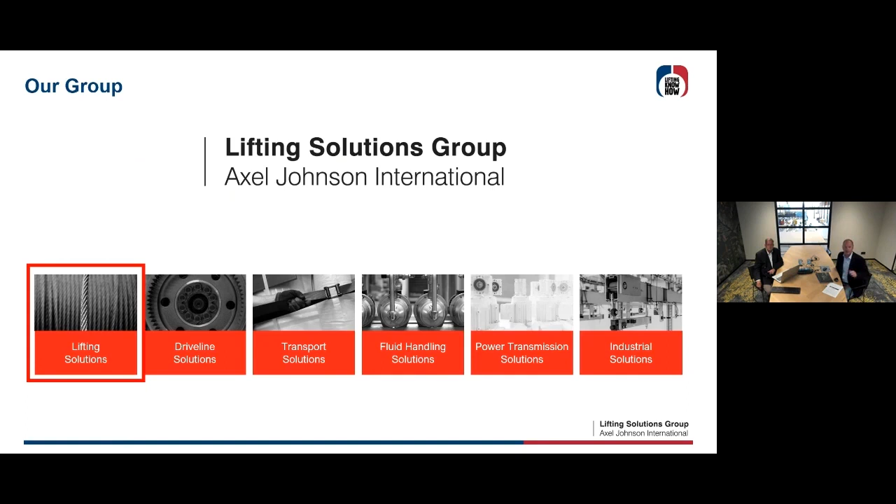First of all, a short introduction about our company. We're part of Axel Johnson International, which is a privately owned industrial group that acquires and develops companies in several strategic niche markets. And the Lifting Solutions Group is one of those 6 business lines within Axel Johnson International. We're a global player specialized in lifting equipment, steel wire rope, and services, but also fall protection, operating as a group.

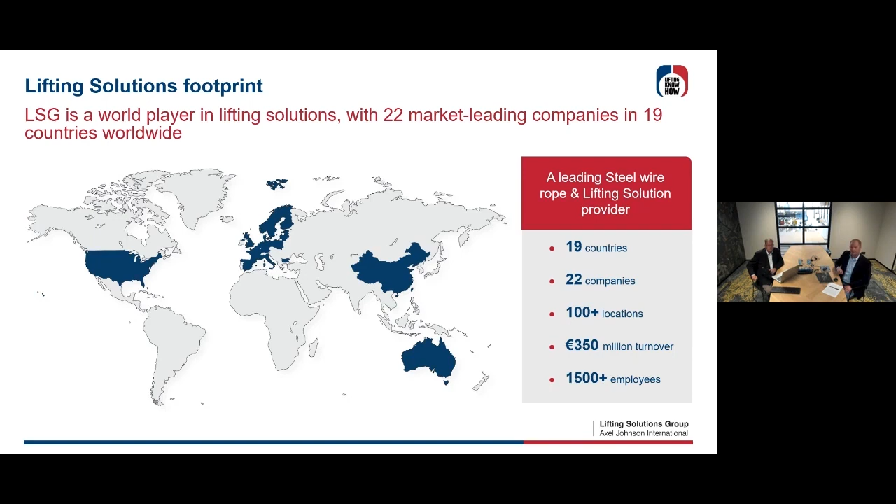22 companies in the group within 19 countries, and every country has almost its own local company that serves local customers. Here you see a little footprint of our company within the world. Mostly is situated in Europe and Scandinavia, but since a couple of years we have Australia with 5 companies, and we also have the part in the USA since I think last year. So we're pretty much spread into the world. This is our group within Lifting Solutions Group, a group of companies with strong local brands and presence and serving customers worldwide.

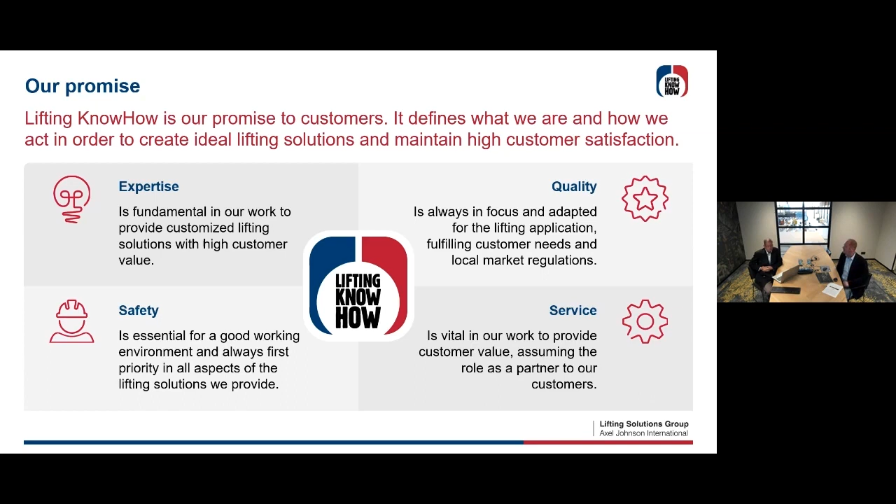And I think one of those logos looks familiar to you. Last slide for this introduction, then I'll hand over to Alain. This is our promise to the customers. We don't only sell products, we sell expertise, safety, quality, service. That's our main goal in everything we do, which is named the Lifting Know-how. Subjects already known: end terminations, cutting ropes, and now hand over to Alain.

Okay, what we're going to do today is talking about end terminations on steel wire rope. As Michel already said, the first seminars were about standard ropes, about high performance ropes, about discarding ropes. Then we had a seminar about greasing and re-greasing ropes. Okay, let's talk today in 20 or 25 minutes about end terminations, because if you've got a good rope, it's very important to also have a good end termination on your rope. Here you see some examples: some eyes, some thimbles, some sockets. Let's talk about these things, which have their certain applications and reasons why, and the advantages and disadvantages.

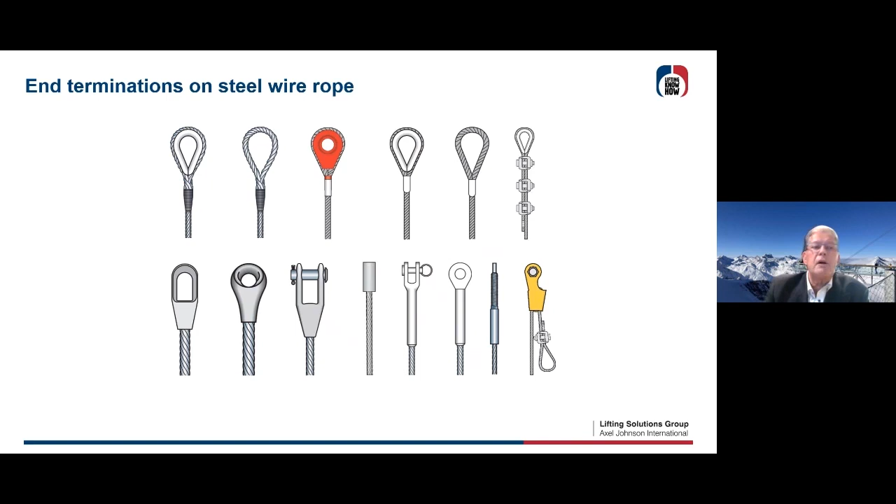So the fill factor will give you the right number of ferrule to use and dies. In general, if you have a rope with a fiber core, you're going to need the same number as your diameter. If you have a rope with steel core, you're going to add one number up to the diameter. And if you have a special rope, let's say compacted, you need to have 2 numbers up for taking the right ferrule. Check it out, because it's very important.

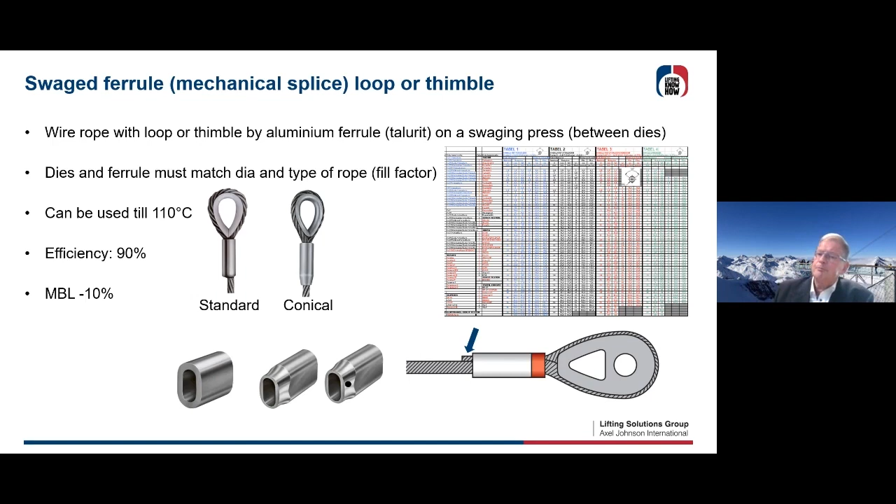The second type of swaging is what we call the Flemish eye or super loop. Flemish eye, well, I'm from Flanders, and I can't explain why everybody in the world calls it a Flemish eye. Is it a Flemish invention? I don't know, but even in Russia, even in French, even in all the different languages, it is called a Flemish eye. And you can do it on 6 and 8 strand ropes.

The procedure is, you split your rope, so in 2 parts. We're going to see a movie afterwards, so I explain it first, and then you're going to see the movie. It is spliced by hand into a loop, or you put a thimble in it, and then if you got the loop, then you're gonna swage it with a steel ferrule, yeah, a conical one.

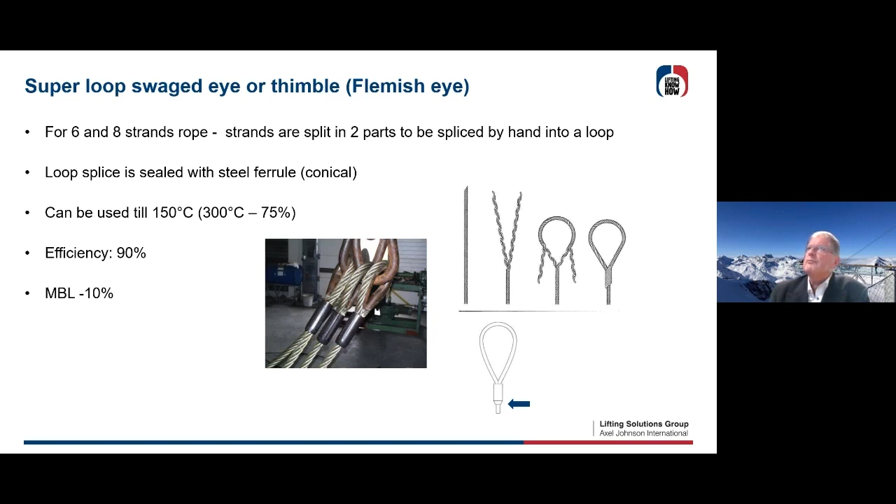And then you have, let's say, the complete splice and swaging, and it has the advantage that you could go up to 150 degrees Celsius because it's a steel ferrule, and even to 300 degrees Celsius, you're going to lose about 25% of your minimum breaking load. But anyhow, for high temperature applications, this is the one to use. The efficiency is also 90%, so you're going to lose about 10% of the minimum breaking load. So let's see now how things are manufactured. I think we're going to start the movie now.

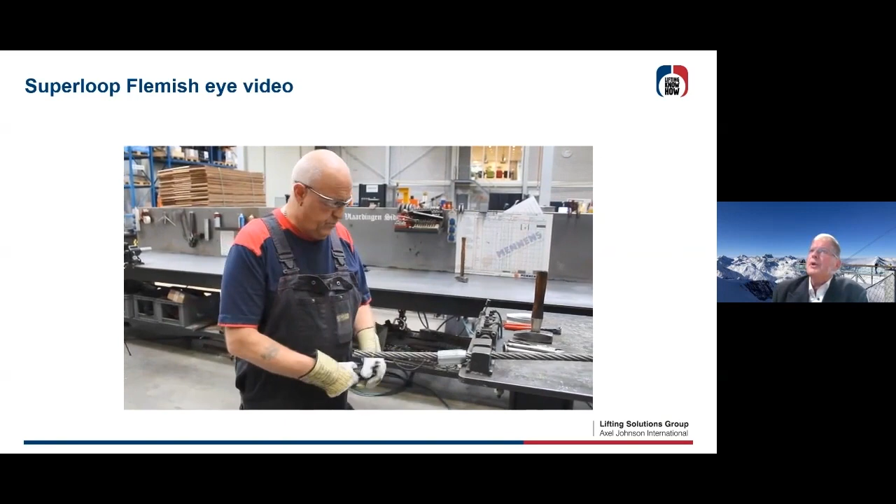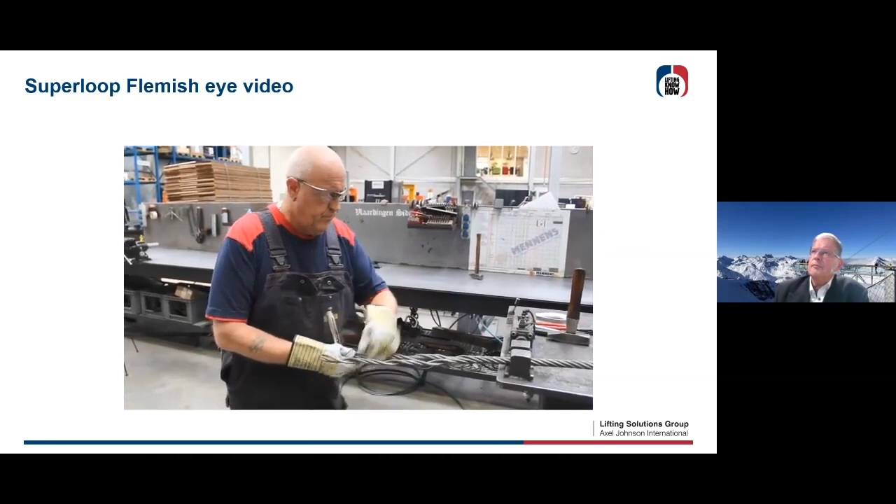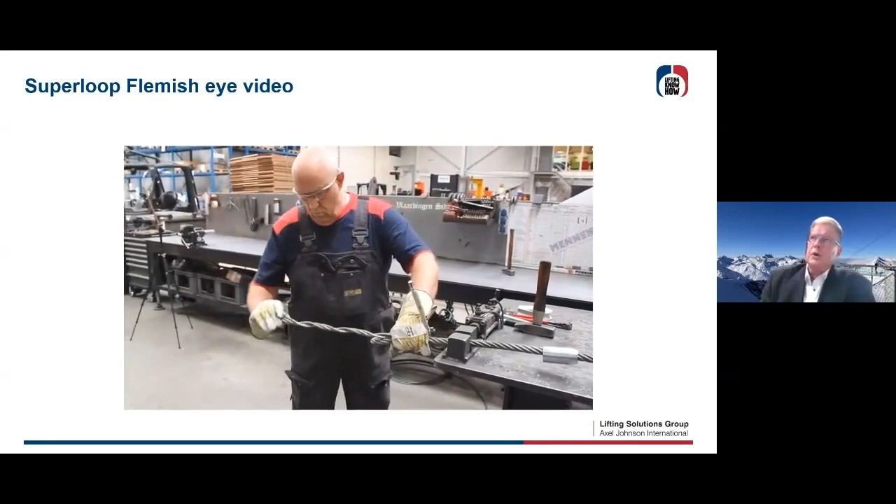First, you just put a line on it where the ferrule will come, and then look at it. The guy is going to split the rope into 2 parts. So this is a 6-strand rope, I think. So you see, he takes 3 strands, and he leaves the rope core and the other 3 strands. Then he puts a clamp on it, and then he's going to make a loop. You see, there's a special procedure. You have to know if you're working with 6-strand or 8-strand ropes, if it is with steel core or if it is with fiber core.

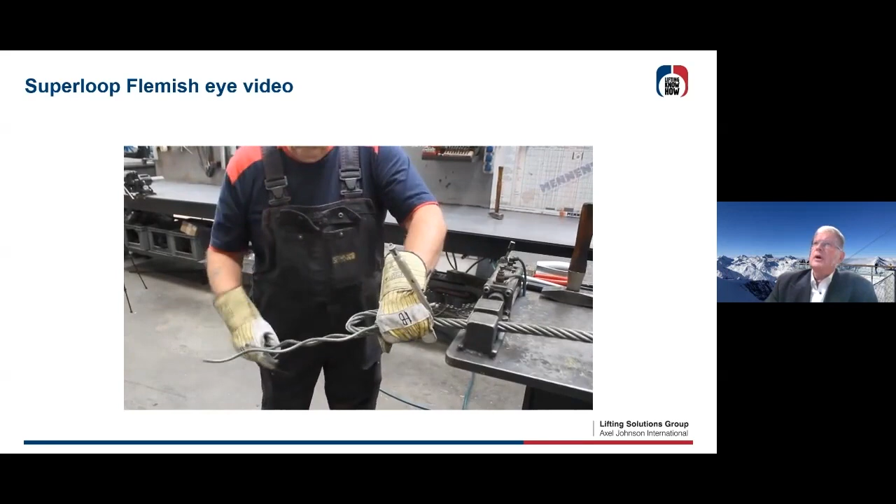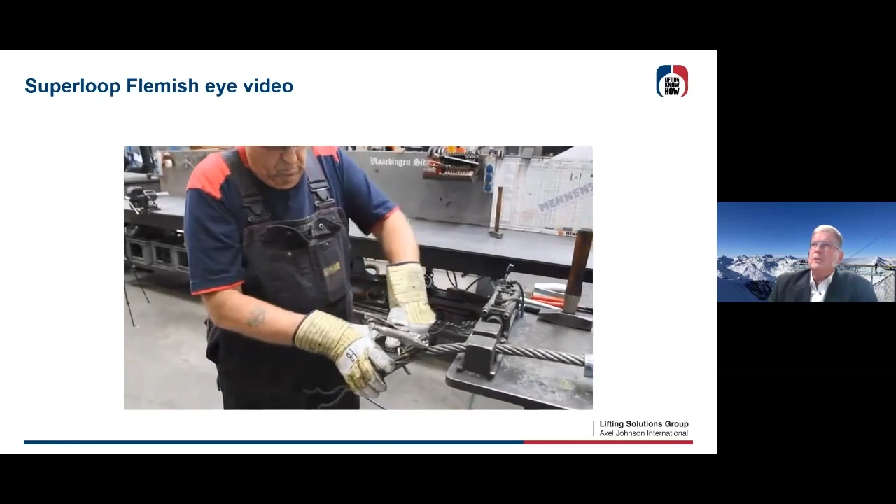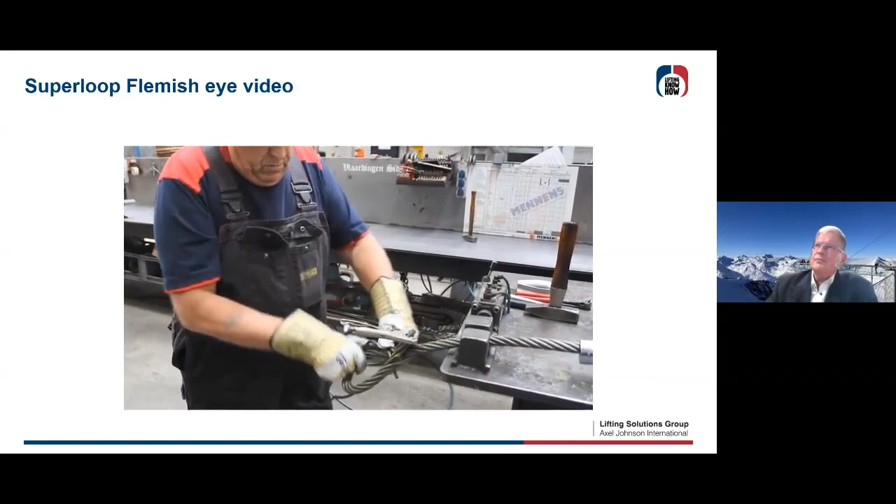There's a certain procedure for it. It is, let's say, know-how, how you do it. You see, he splices the 3 strands back into the loop. This is a small diameter, but you can imagine if you were talking about, I don't know, 58 millimeter, then you're going to need 2 guys to do this job. So each strand goes back into position. Okay. And the last one. So you got an eye.

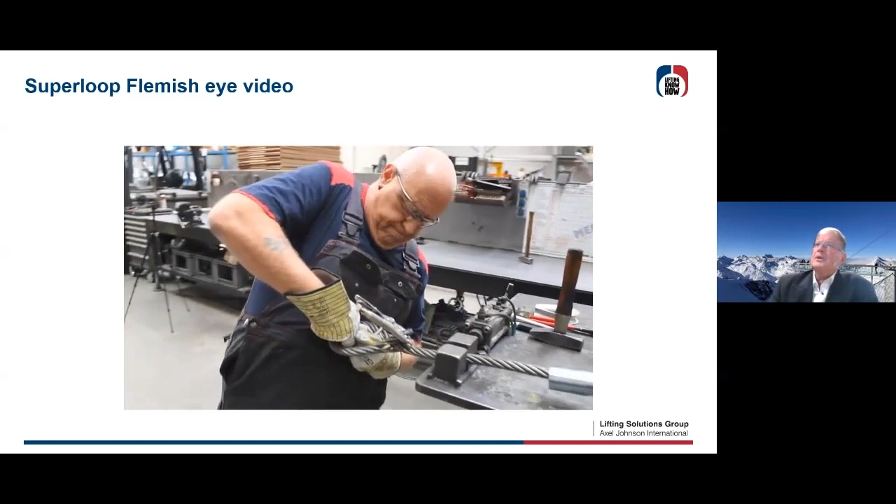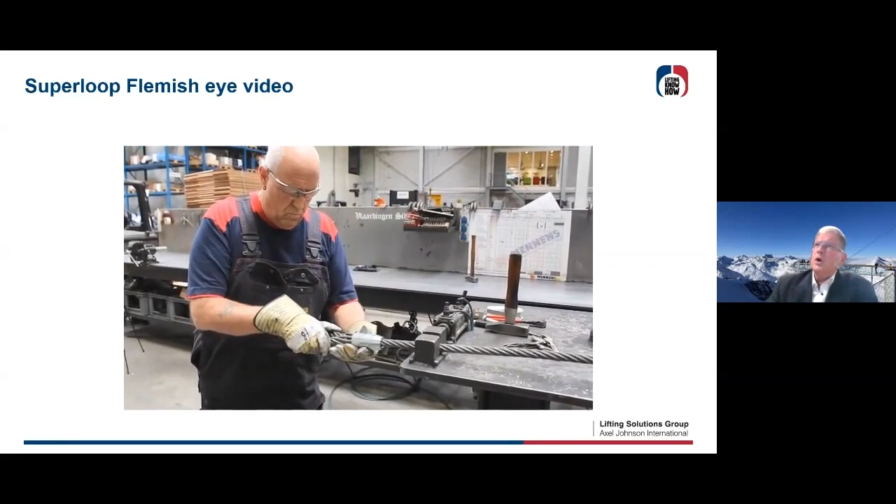Now we can put a thimble in it if you want. But he's going to splice now these little ends into the rope, and then you're going to pull the steel ferrule over the splice. So this is sometimes a harsh situation. I mean, sometimes you need to have some equipment to really slide it over. Okay, this is the first step. If you leave it like this, hand splice will give you about 75% of the minimum breaking load. So in some emergency cases, you could use a Flemish eye, just splice it like this, and then you end up with 75% of the minimum breaking load. Now we're gonna finish it up with the swaging.

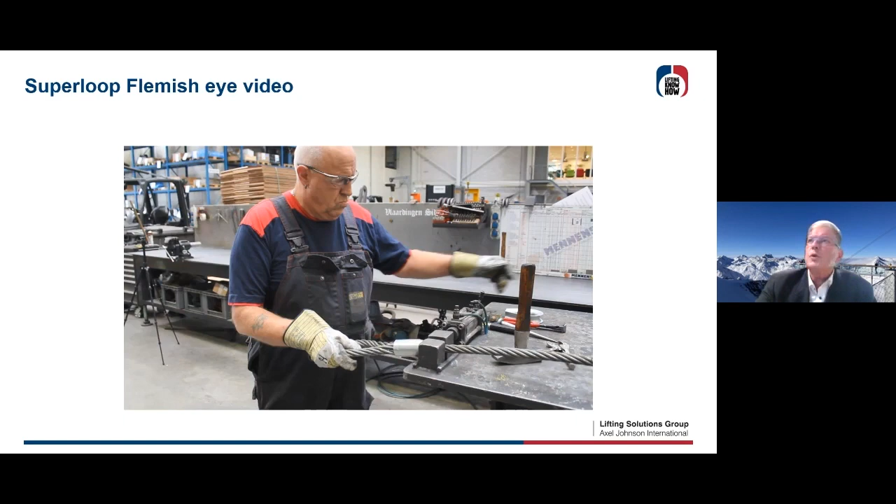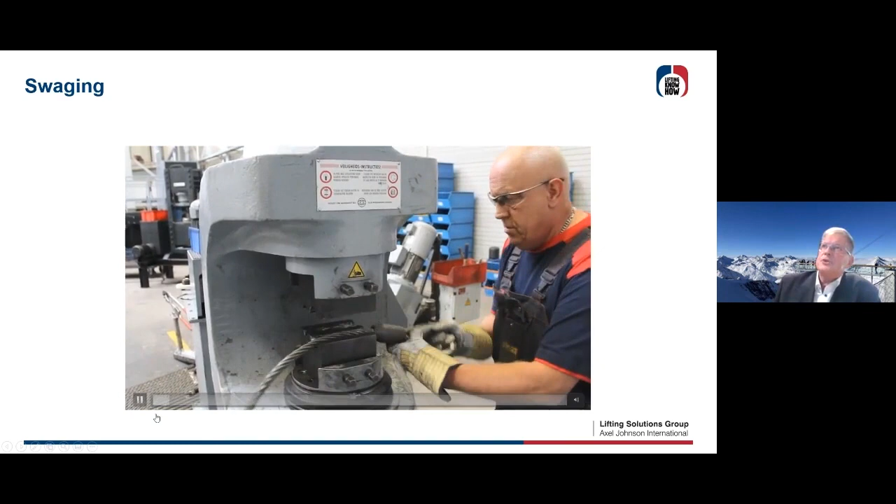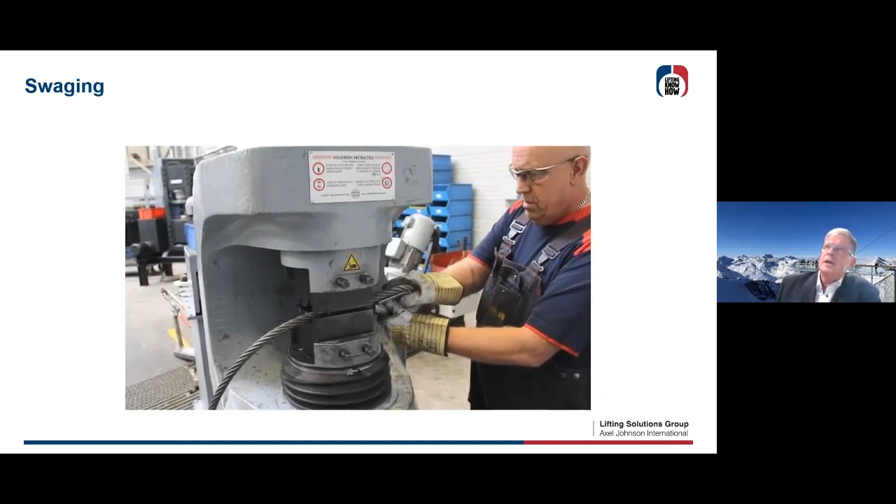Let's hope it starts. Okay, so then you need to put your special dies into the machine. For some diameters you use your swaging die once, and for other diameters you use it two times. Okay, you can see he turns it until the dies are completely closed.

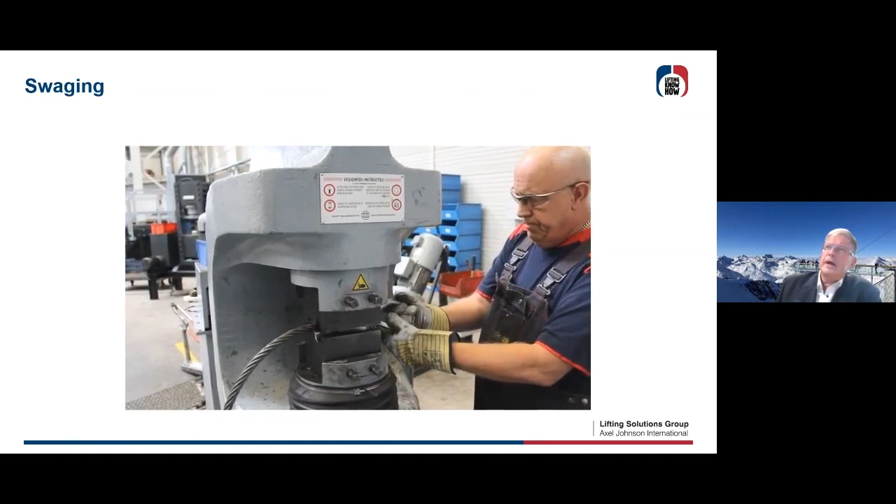And then he puts it into another die, let's say. Okay, so he turns it and he waits till the two dies get completely closed. Okay, that's it, guys. So you have your complete Flemish eye super loop swaged termination. There you go.

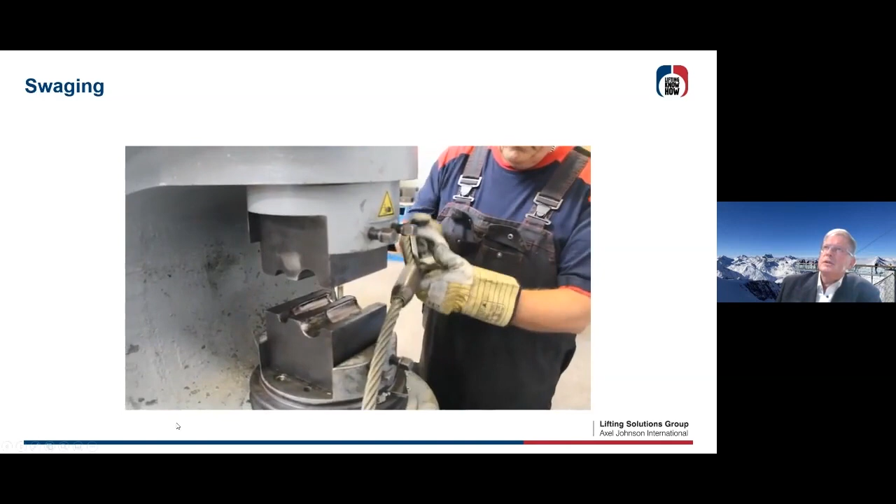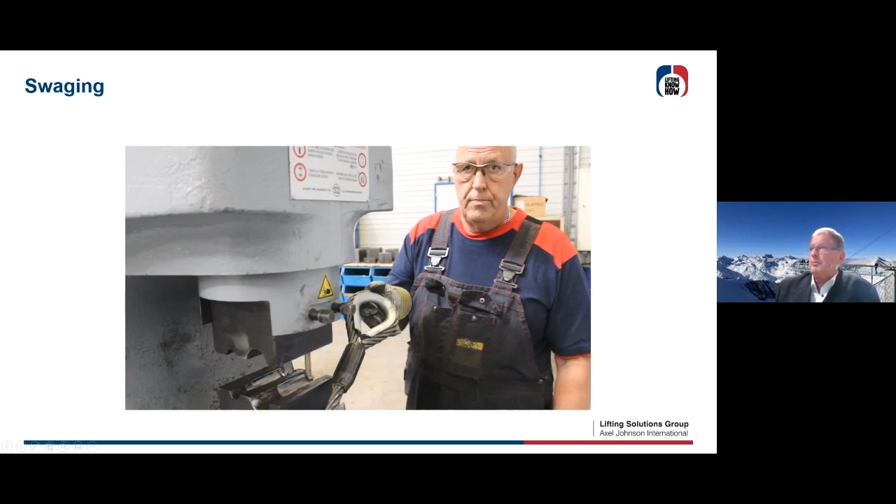You see, it is conical, so sometimes it has the advantage that it can be easily used underneath your loads to pick them up.

Okay, another termination is the swaged forged terminal. You're going to have different types, let's say. You see here some with an eye, some with a fork, or there are applications where you need a thread end. It is all done, as seen, with special dies to swage on. Sometimes there are standard dimensions you need to put into the dies, or sometimes you're going to end up with custom-made things.

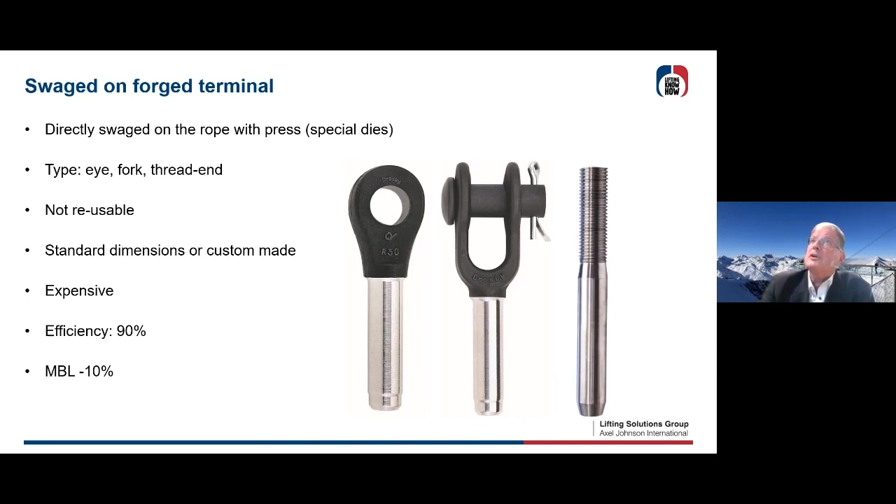So be careful, not everybody has all the dies in the workshop. So sometimes you need to go to a standard dimension. It is, of course, expensive because these things have to be made properly, and all the different kinds of dies also cost a lot of money. Efficiency is 90%. So it is, let's say, very special with these kinds of forged terminals.

Even for end stops, you can use the same procedure. You swage that end stop on the rope with special dies. Sometimes you have very special end stops with dimensions for Liebherr, Demag, Fuchs. These dimensions depend on the socket you're going to use on your crane. These swaged end stops are normally done on new rope, so the diameter of a new rope will fit into these end stops.

And attention, if you're going to use it on used ropes, due to damages you may have, then be careful. Normally we do a test then to see if the fitting is 100% safe. So you have in the pictures different types of end stops, round ones, special ones, but be careful. These dimensions have to be checked.

Another very common end termination is sockets. Sockets like you see here, so open spelter sockets or closed ones with certain pins or with bolts and so on. This kind of socket is the strongest end termination and it is reusable. If you use a spelter socket with resin poured in, normally you can empty the socket afterwards and use it again. So sockets are reusable. This gives you a price advantage.

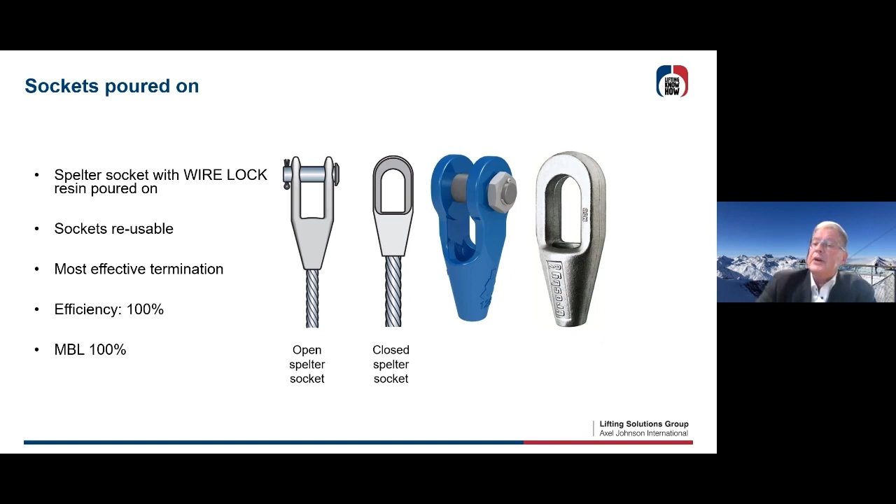How is it done? Well, this is the only end termination which gives you 100% of the breaking load of your rope. And it is, of course, done with a certain procedure. I give you a little show here of how this has to be done. First of all, you have to seize your wire, like it is there in the pictures. So you need to seal your rope. Then you open up all the different strands, even the center core.

If there is a rope core in it, you have to cut the rope core out of it. And then you open up all the strands to form a broom. This broom afterwards has to be degreased, because in your rope you normally have a certain amount of grease, but for socketing, the broom has to be 100% clean. So we have to do some degreasing on this part of your rope.

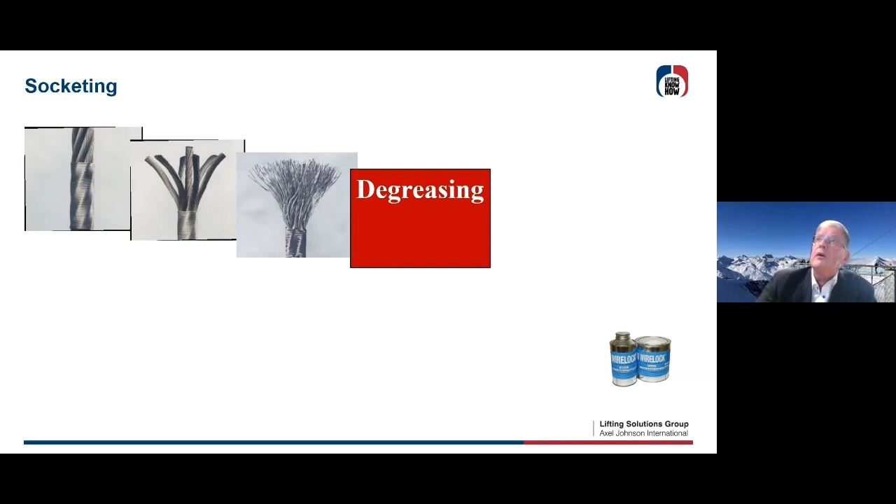Then you pull the socket over it, and then you make your two-compound resin. Normally it is a powder and a fluid, which has to be mixed thoroughly. And then you pour it into the socket, and you wait about half an hour or an hour, depending on the temperature or the dimensions of the socket. You wait for, let's say, one hour, and then you can use your socket and your rope immediately.

This was the first resin which was certified by Lloyd's. So it is still the original one, let's say, invented in England. You can use these end terminations till 150 degrees Celsius.

Be careful, there are other resin types which are not usable till 150 degrees, only till 70 or 80 degrees, and be careful if you use these things on, let's say, a dredging ship. If these sockets are in the sun, let's say in the Pacific, they can easily get up to 100 degrees in tropical situations, so be careful.

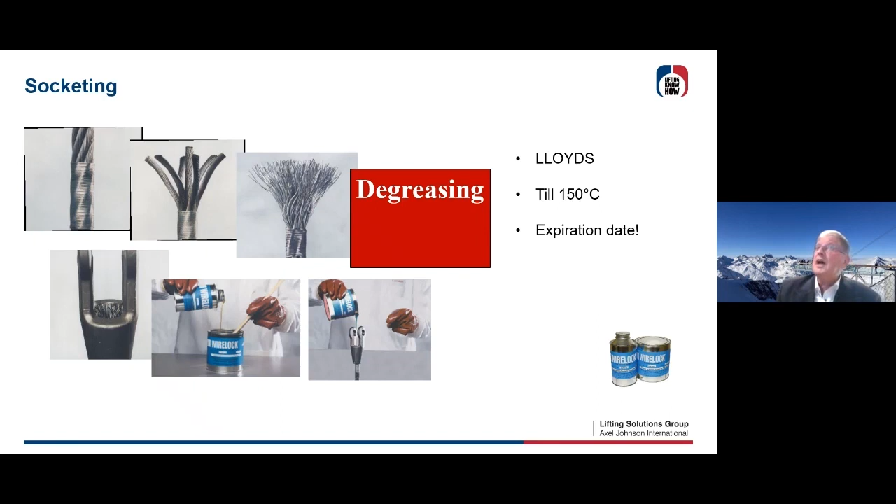This is socketing. Let's see how this works in practice. We have a little movie. I'll show you. If you've seen it once, you're going to remember it forever, I think.

Oh, something's gone wrong. Just turning back. I think, okay. There it comes. Sorry, guys, but this is technique.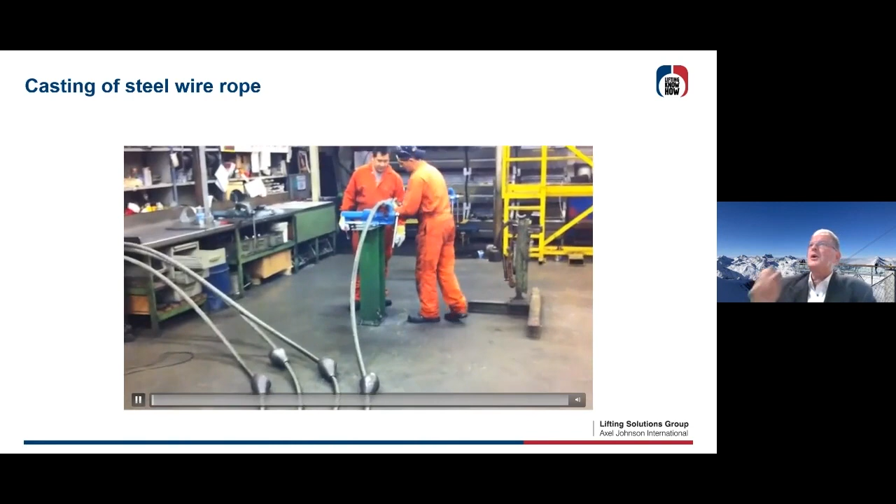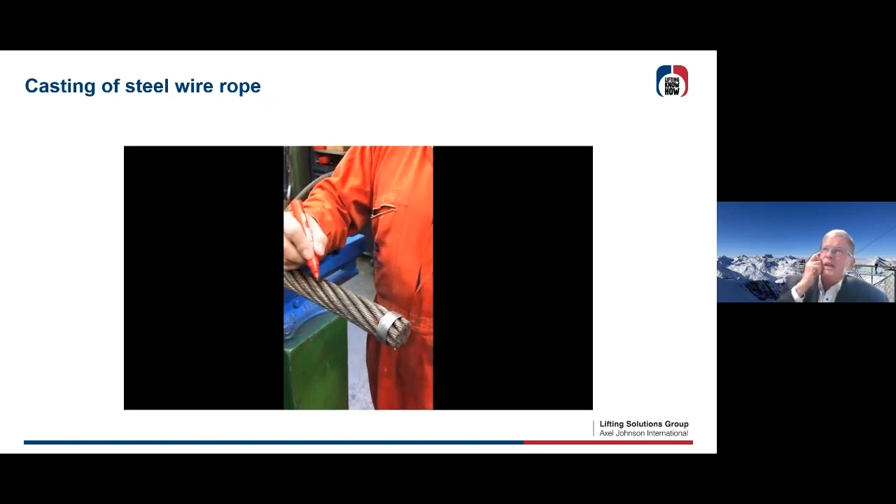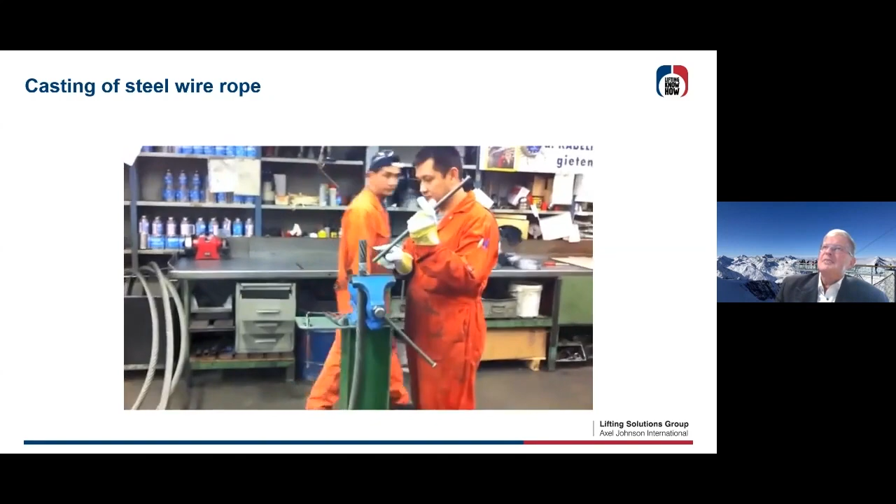Okay, let's do it. First of all, you have to have the right dimensions, where the socket is coming, which part of the rope needs to be opened, and then you have to seize it thoroughly. Look at this. This is well done, I think. It's a Mennens invention, I think. Okay, you see, very well seized.

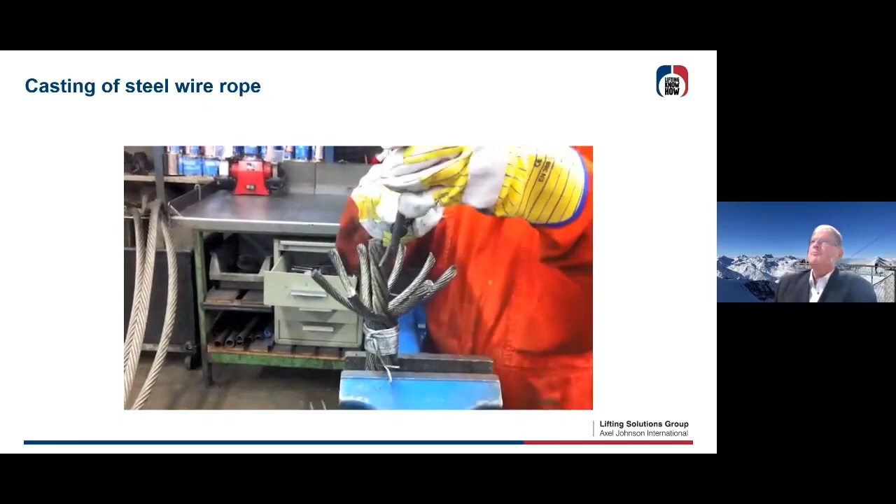And then you open up all the strands. I think this is an 8-strand rope. So every strand has to be opened up like this. Again, if you have a steel core, you open up the steel core too. If you have a fiber core in it, you cut the fiber core out. If you have a high performance rope with plastic infill, you have to cut the plastic infill too. So all the strands now have to be opened like this.

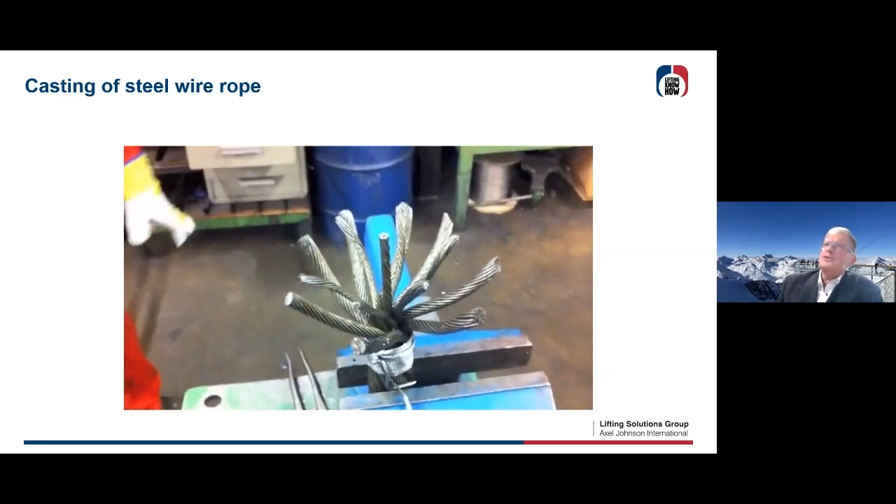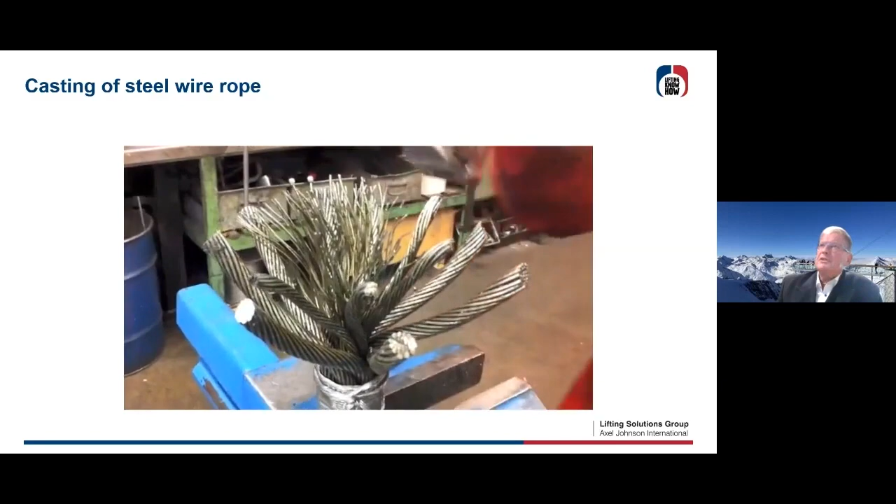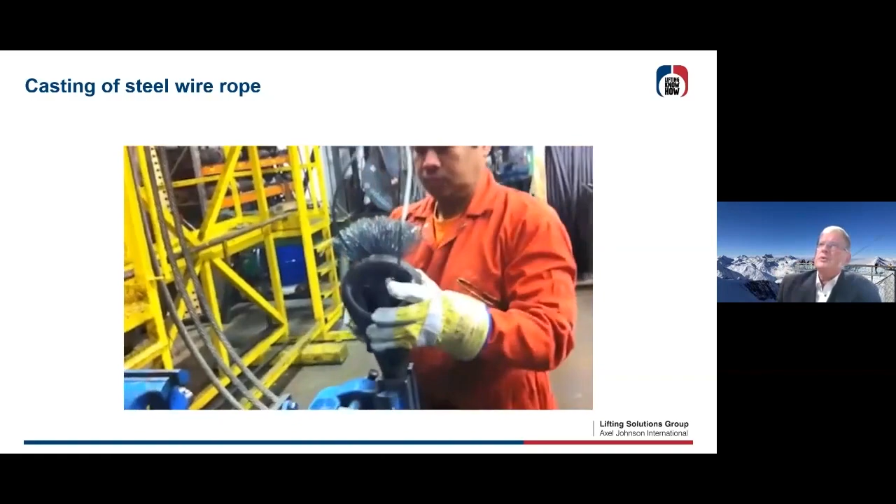You see some specific tools we have also invented to open this up easily. All the different wires have to be spread into a very nice broom. Open up thoroughly. You see that all these wires still have a little grease on them. You make a very nice broom, and then you degrease the broom. You have several kinds of degreasers to use. Once the wires are degreased, they are clean, and then you put the socket around it.

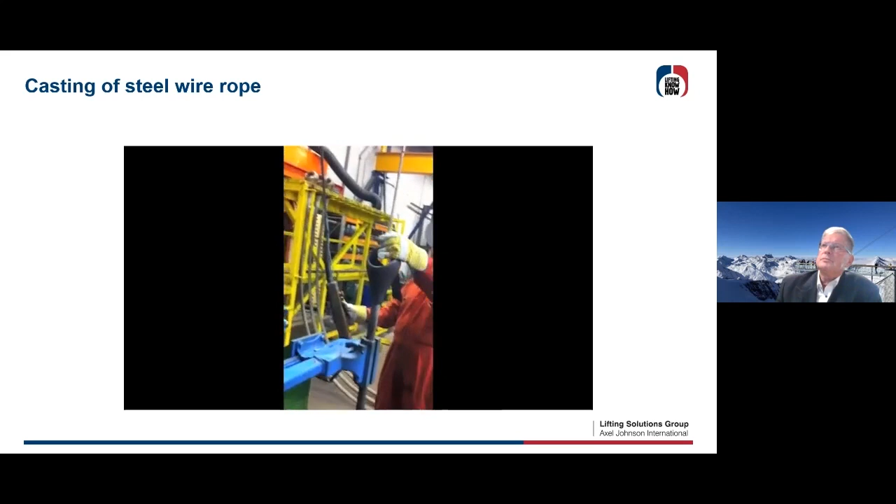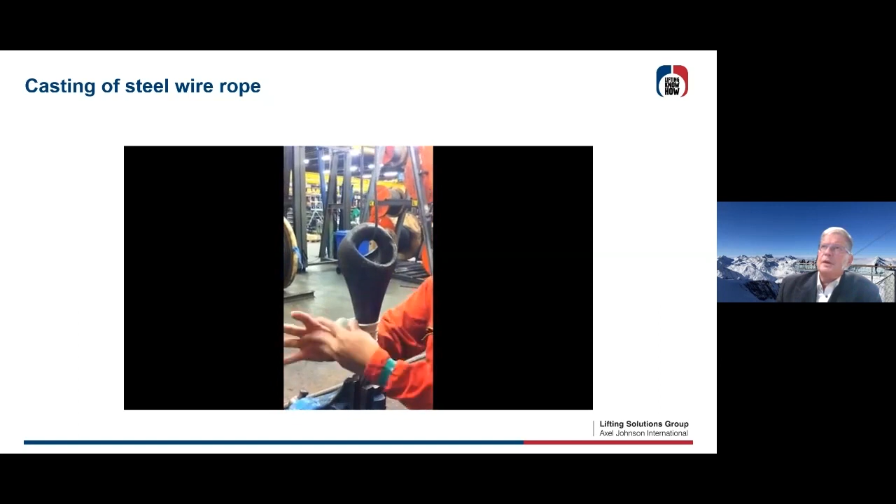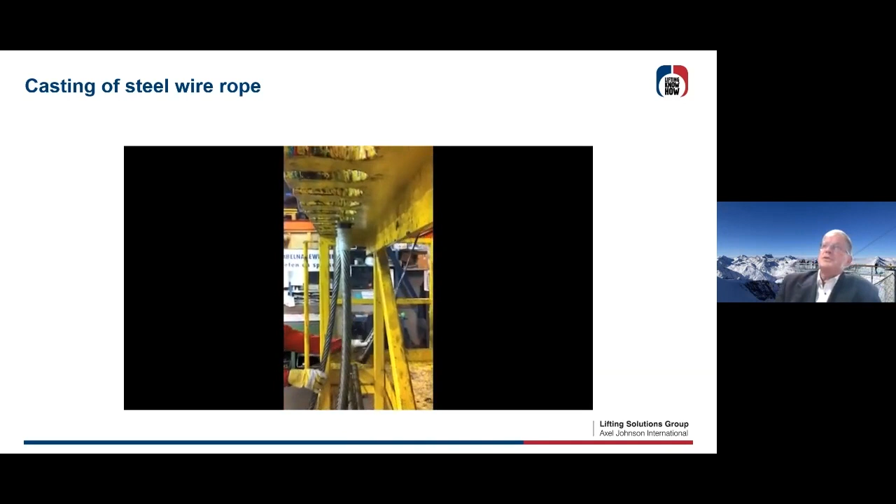Okay, and then you seal the bottom of the socket because you're going to pour fluid into the socket. So you need to seal off the bottom of your socket so that it won't drip out. This is a special tape we're going to put in there. Okay, and then we put it into the stand. In our workshop, we have different stands like this. So when we do the pouring, we can pour several sockets at a time. There you got it.

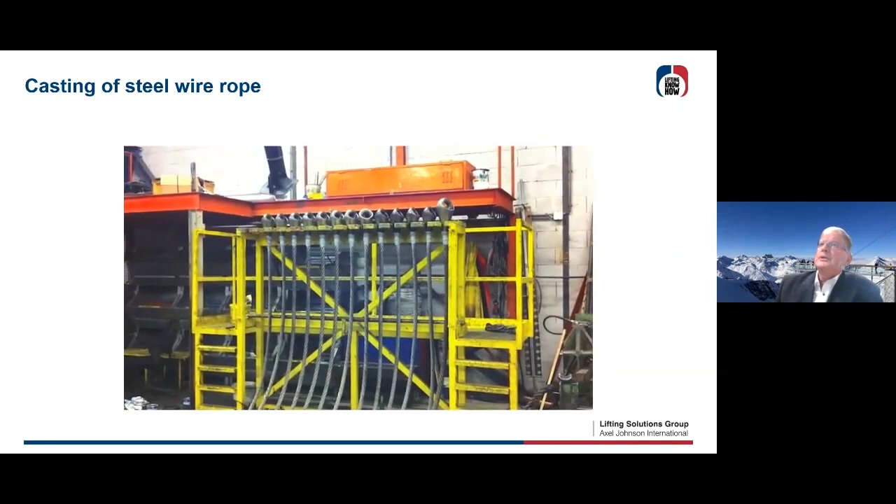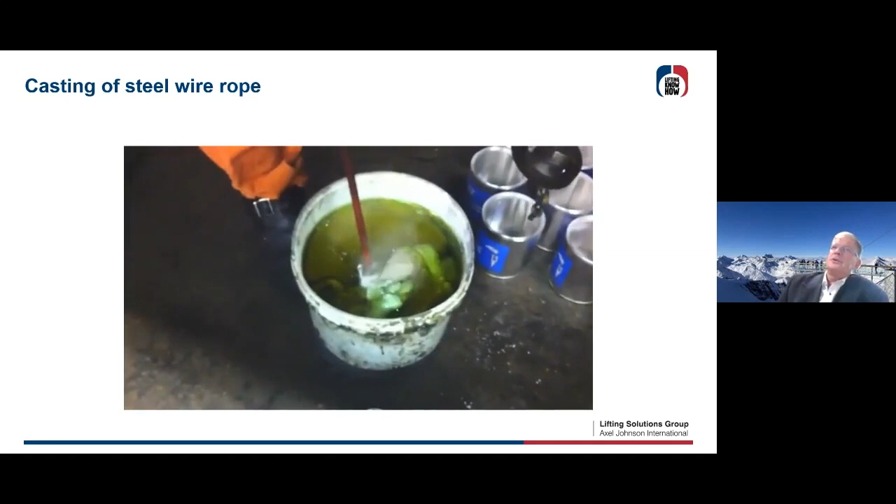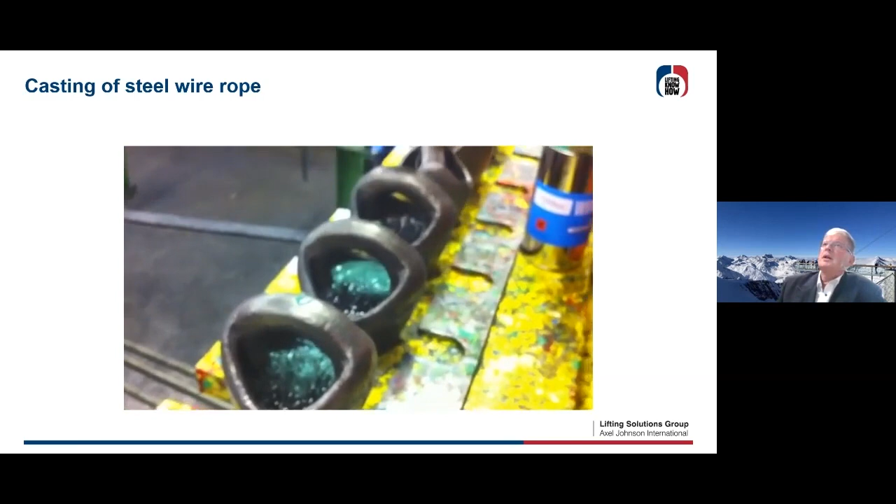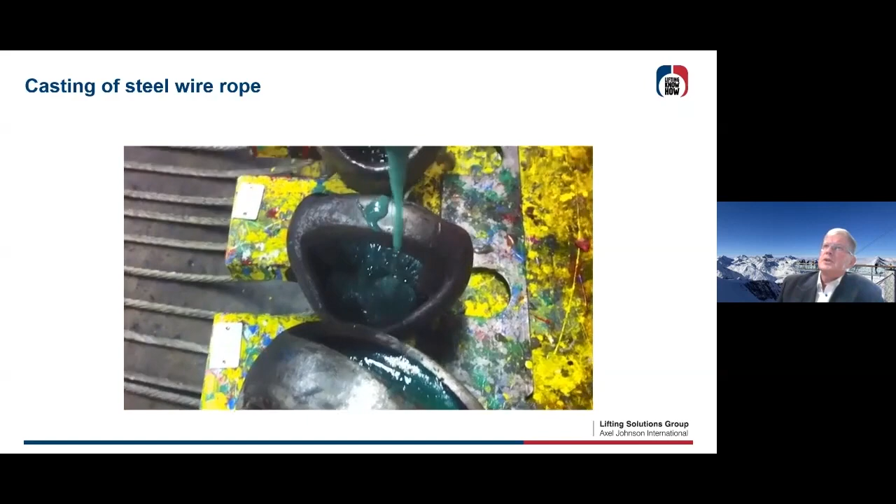And then, okay, we prepare the resin. You have a fluid part and you mix it up with the powder. Once it's fully mixed, you can immediately start pouring it into the sockets. You put some in first, so things will get deeper and deeper into the socket, and then you pour some more. So then in the end, you're going to see that this is at the right level. You see, it's going down, down, down. So you wait, and then you put some more in it, and then this is the end situation.

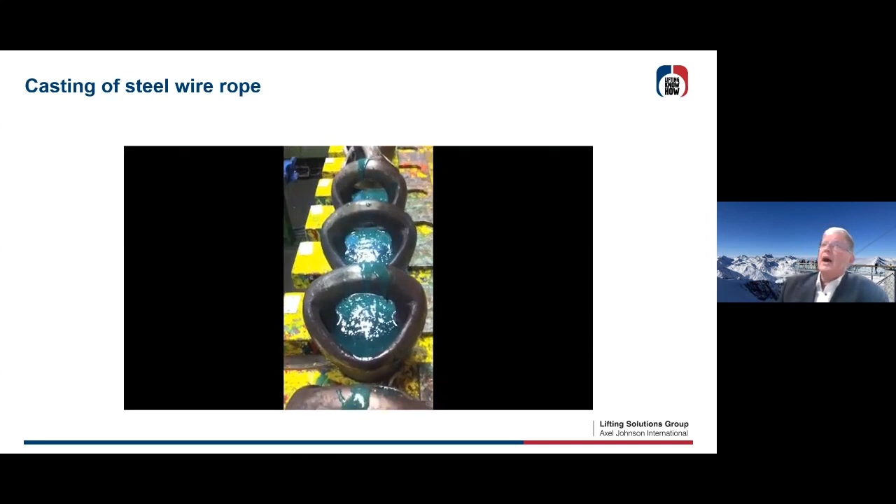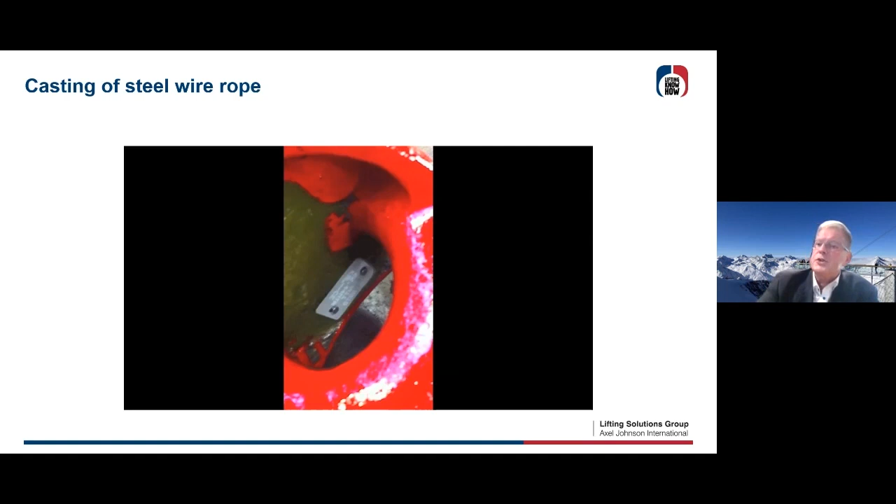And then you wait for about an hour. The socket and the resin will warm up to about 50, 60, or 70 degrees. So there is a chemical reaction. What you can see here is the end sockets. We normally put a mark plate in it with who's done it, where it is done, with a number, so that things can be checked afterwards. We also re-grease the little part under the socket, which was eventually also degreased. So we put a special grease under the sockets, so that the socket and the part under the socket is re-greased again. So this is, let's say, the resin type of pouring on.

In some countries, and especially in Germany, there are still sockets poured on with fluid metal alloy, let's say Zamak. It is hot metal, which has to be poured in at about 340 degrees.

The sockets are reusable, but be careful. Every time you socket it on with hot metal, you have high temperatures, and sometimes you heat it up above 340 degrees, and then you have a change of your socket material. Of course, you also have deterioration of the wires by temperatures with this kind of casting.

You also have 100% efficiency, and the same procedure about the wire lock resin is done, but of course it's much more difficult to do because you have to take care of high temperatures, warming up the sockets and so on. You have the advantage that if you need to use the socket again, you can let the hot metal drip out of the socket.

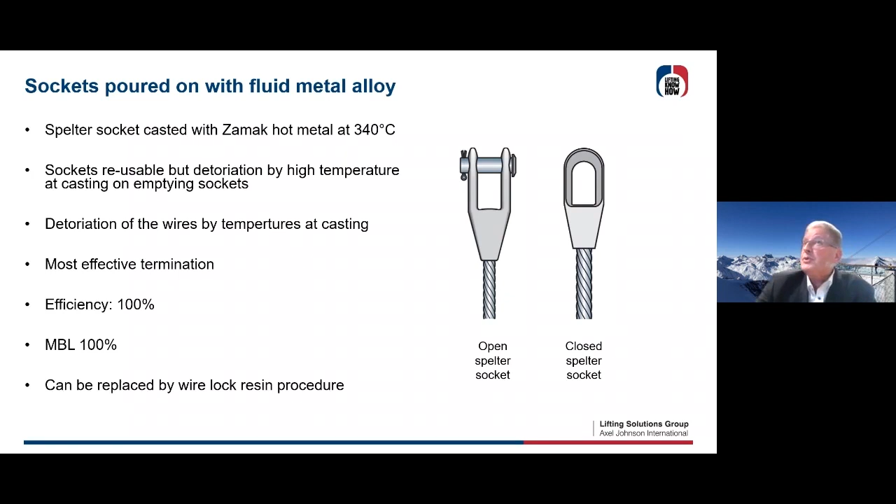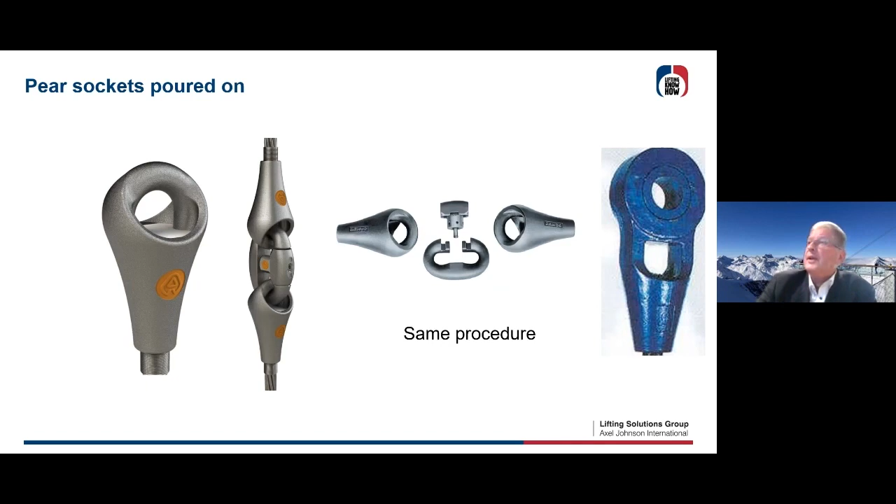If you do it with wire lock resin, you have to press the complete cone out of the socket. So there you're going to need a press or something to empty the socket. That's it with sockets. I show you here some more different kinds of sockets, like pear sockets, which are very common in bands. And on the right side, typically sockets from Demag or from other brands. You can use them.

Due to the easy procedure of socketing, in the last 15 years we invented end stops for socketing on ropes. This is done with smaller pieces of end stops, as you can see, with special housings or special sockets where this end stop will fit in. The dimensions of the socket and of the end stop are special for each brand: Liebherr, Demag, Manitowoc, Faun. So it is done mostly on non-rotating ropes for easy reeving or multiple reeving on mobile cranes.

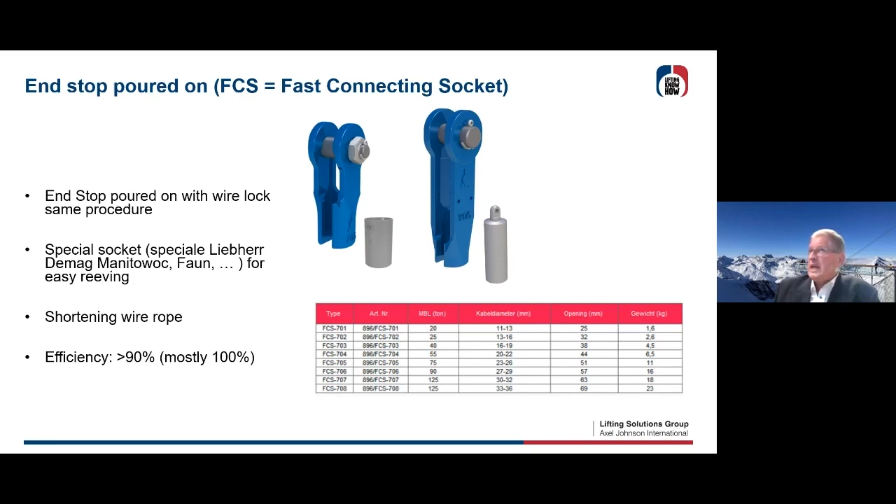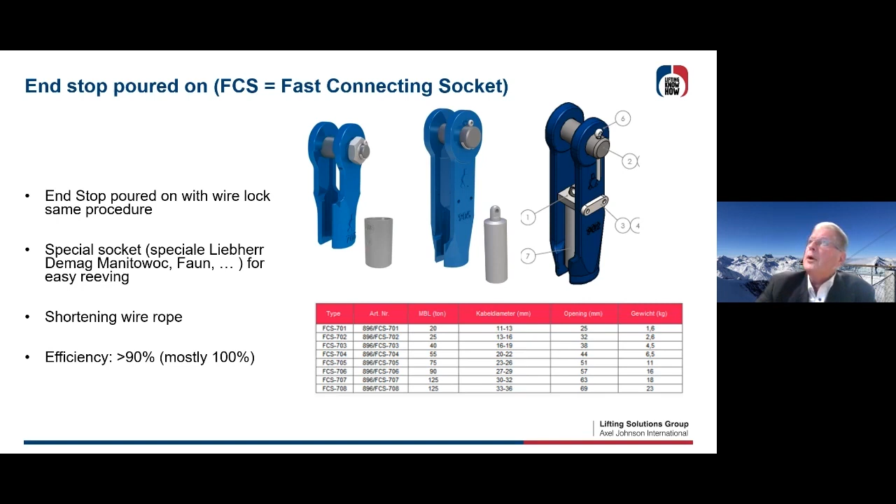You can also use it if you have damage on non-rotating ropes, for shortening your wire rope, so that you don't need to buy a whole new rope with an end fitting. Efficiency in the norm must be 90% or more, but we can guarantee you that it will mostly be 100%. So they fit into certain sockets, depending on the brand of crane you're going to put it on.

And typically brand-specialized things can look like this. You can see there are a lot of different end fittings and stops to put on ropes, each with its specific dimensions, length, width. So be careful that you use the right end stop to be fitted on your rope, and that this end stop will fit into a specific socket from all these different brands of crane makers.

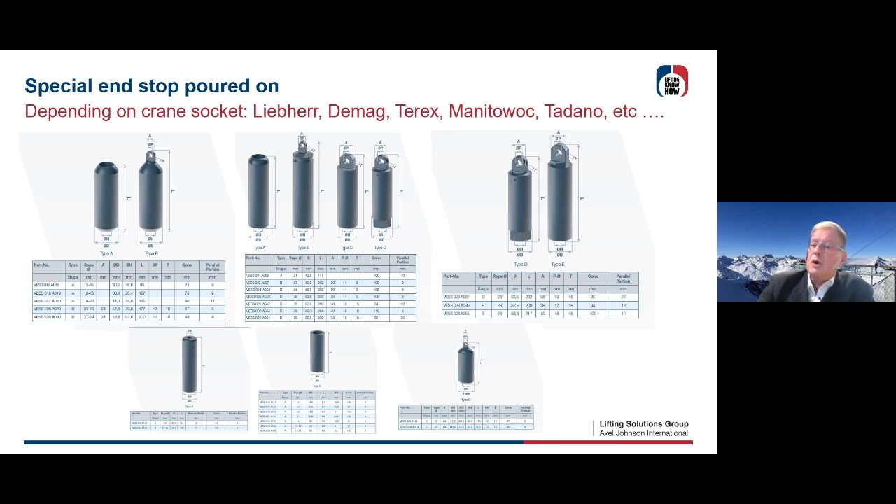Another one still used is the hand splice. I mean, splicing strands into the core by hand using the right procedure. Where is it still done? Well, it is done where a ferrule is not used or wished because it's going to be in the way. Initially it was used where there are very high temperatures, because you don't have the swaged ferrule, which is limited in temperature.

So there, all the strands are spliced into the core, into the rope, and temperatures can be used up to the temperature limit of your wires or your rope. It is, of course, expensive because it is hand splicing. It costs a lot of time and expertise, and the efficiency there is about 80%. So due to splicing with hand splice into the core, you're going to lose 20% of the minimum breaking load.

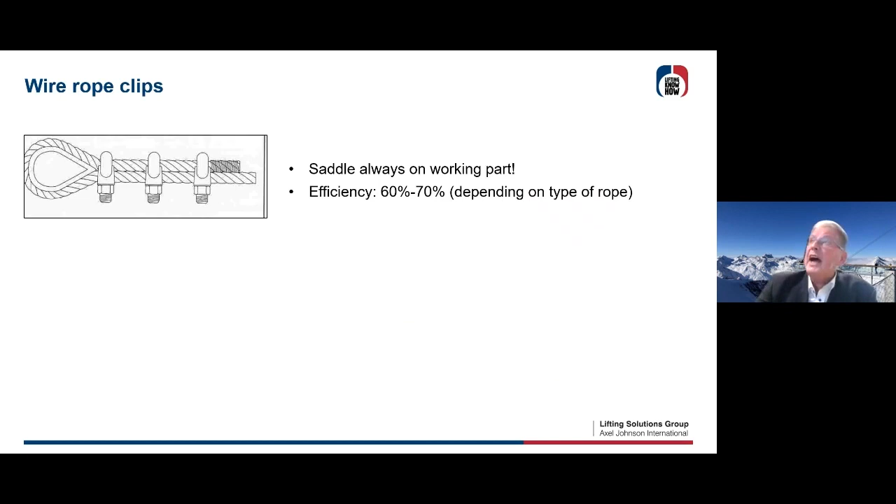Some people still use wire rope clips. As you can see here, wire rope clips can be used, but be careful. Saddle always on the working part. You see 3 of these wire clips. They are all mounted in the right way. So use it like this. You see the dead part will take the U-bolt side of your clip. Efficiency is about 60 to 70%. It depends also on the type of rope, but be careful. Efficiency 60 to 70% if you use the right number of clips.

Then if you have put the wire rope clips on your rope, you use a torque wrench to get the right tension on your wire rope clips. So you're going to use a torque wrench just to have the right numbers to put it on. And then, very important, sometimes you need to check that torque again because the rope will get thinner in diameter when you put the load on it. So you need to check again. If you do that, all these things will give you 60 to 70%.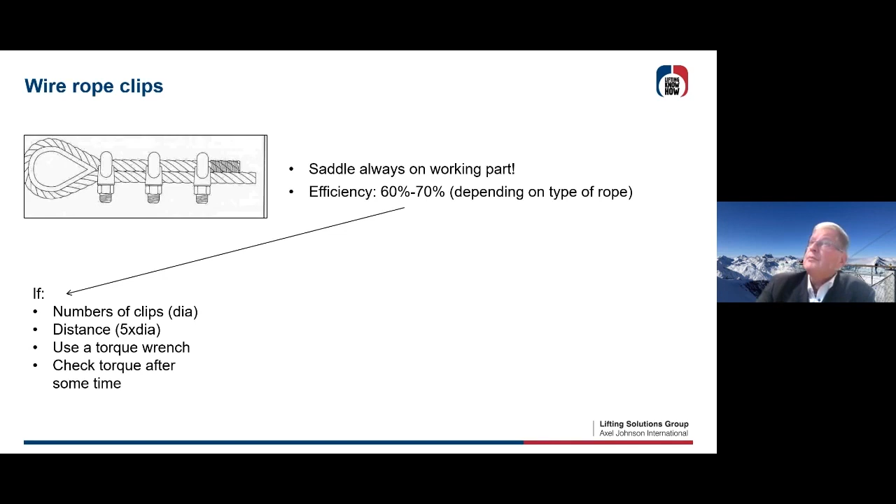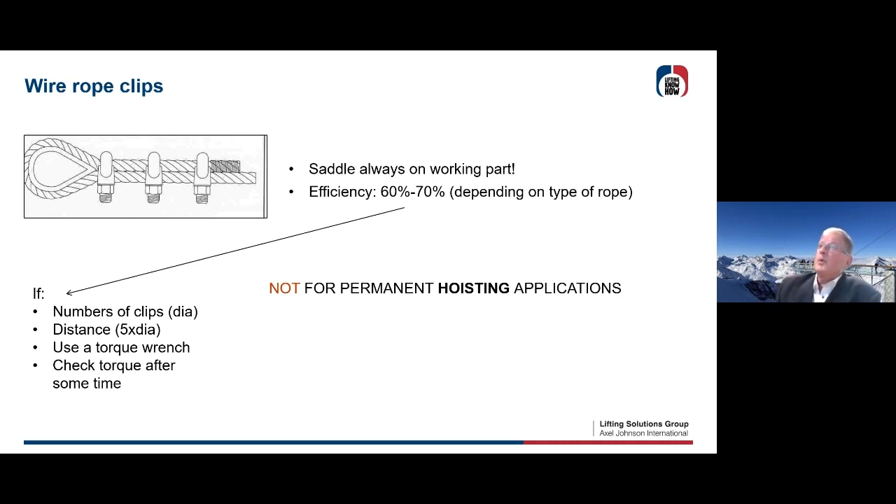Now, let's be honest, nobody is doing this properly, and that's why I would propose not to use it for permanent hoisting applications. So don't use wire rope clips in situations where you have a hoisting application. Yeah? I have to tell you, check in your country if it's still, let's say, normal to use these things. I can tell you that in Belgium it is forbidden to use wire rope clips for permanent hoisting applications.

So only for emergency things you can use it to hold up a rope which has, let's say, a problem, or temporarily for cases like, for instance, reeving. Then you could put some clips on it just to pull your rope into your installation. So please, I have to mention again, not for permanent hoisting applications.

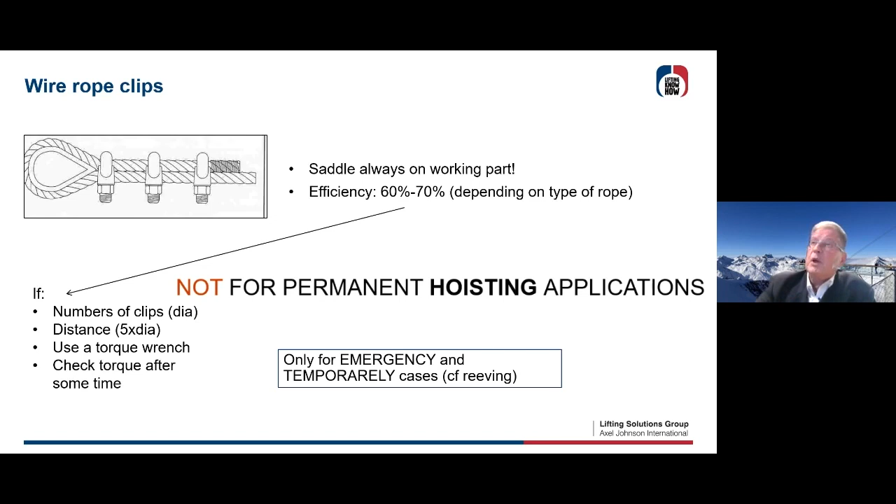Another termination, very common and used on overhead cranes, is a wedge socket. This is for quick mounting of rope, let's say, easy and quick, and if you have to replace the rope, it's much easier to do. So it is a housing with a wedge. Be careful that housing and wedge came from the same brand, very important. There are different designs for different constructions of the rope. So some have wedges which are, let's say, bigger or even more adapted to the type of rope. And also be careful to put a clip onto the tail to block the wedge so that the rope can't go loose if you have a shock or something.

Efficiency is certainly lower than 80%. So it all depends, let's say, on the type of rope, non-rotating rope or high-performance ropes. So efficiency, you're going to lose certainly about 20%. And for some high-performance non-rotating ropes, there has been a development by Crosby for special wedge sockets like you see there, where you can have certainty that your non-rotating rope will gain about 80% efficiency.

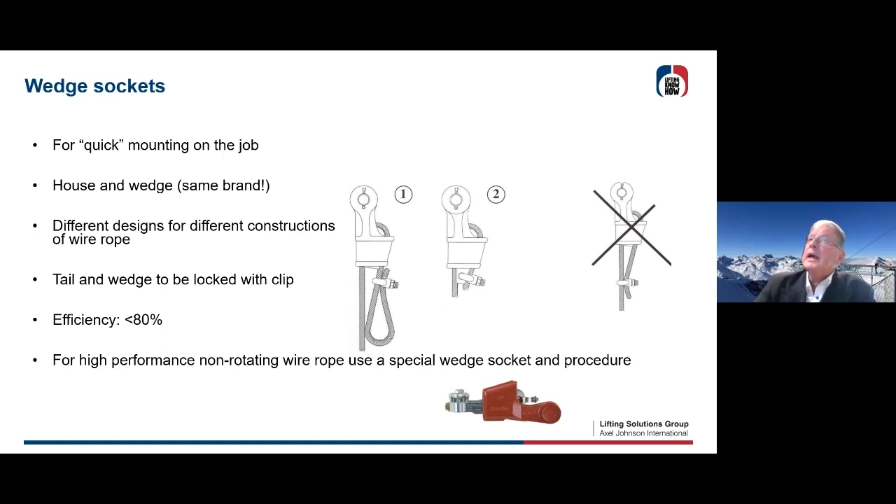Other things you can put on your rope is a pulling eye. There's a welded chain link, let's say, at the end of the wire. This is for pulling your rope into your installation, or for reeving, or for fixing a rope easily on your drum, on your hoisting drum.

You also can use for mounting ropes or dismounting ropes a Chinese finger, also called a cable sock, that's a woven cable grip. You put it on, let's say, the used rope, or you put it on the new rope, so you can pull it into your installation. Efficiency, well, that depends. It's about 10 to 30%. You don't need much more than this. It's just for taking the rope and pulling it into the installation.

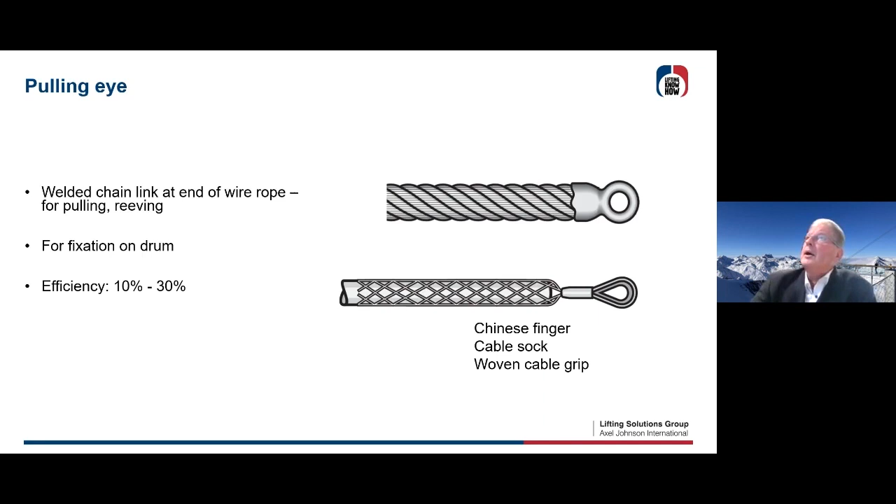Okay, and now something for uncoiling and cutting steel wire rope. I show you the only right thing to do.

If the pictures will start, just a minute. Yeah, that's technique, guys. It's much easier doing rope than, okay. Oh, hold on. No, wait a minute. There it goes. Yeah, okay.

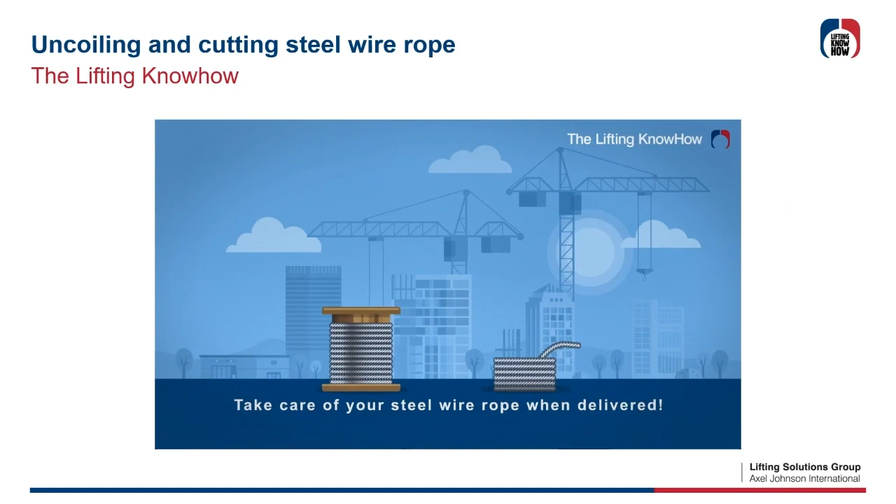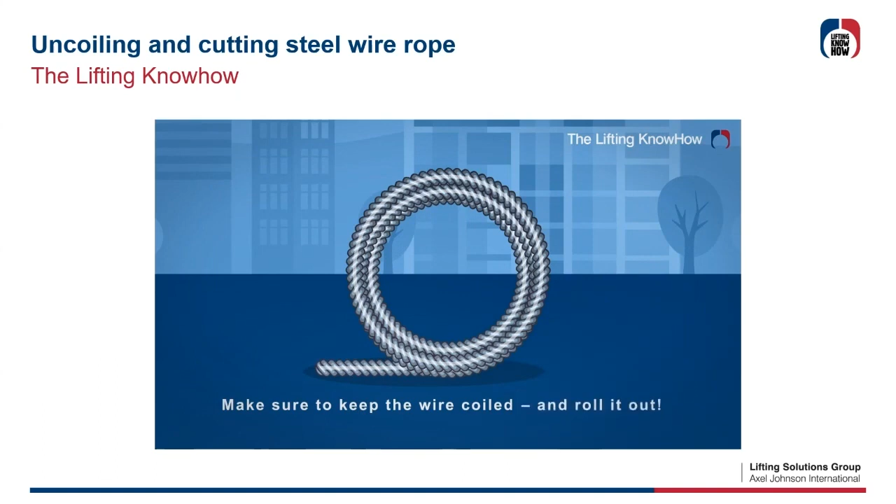So let's talk about two things, how you can treat your rope properly. This is not the way you treat a rope. Everybody who is familiar with rope will know that this will get you into big trouble. The rope will be destroyed, so kinks. If you're going to lay it down or you're pulling it in, you put it on the ground like this, or be certain it's going to be on a reel or on a coil, which will turn.

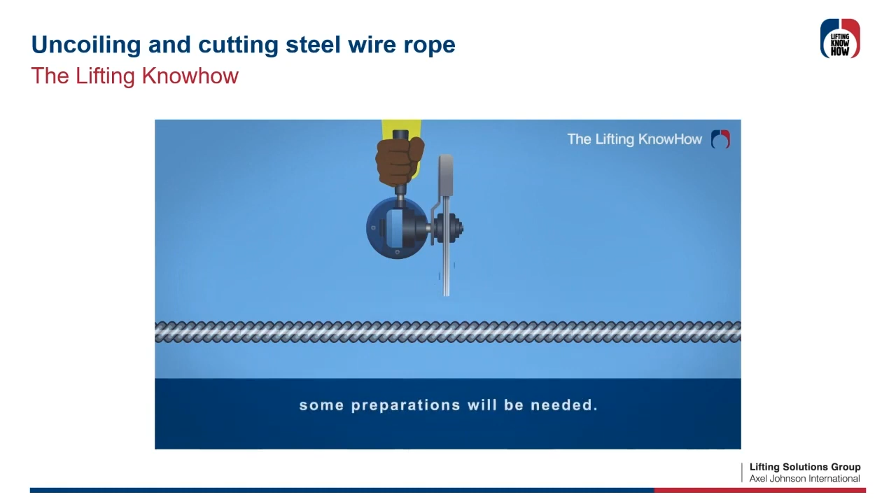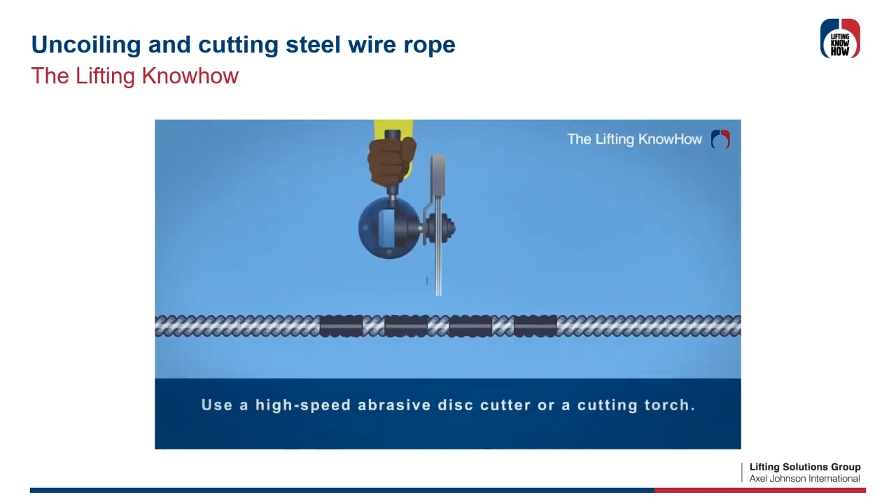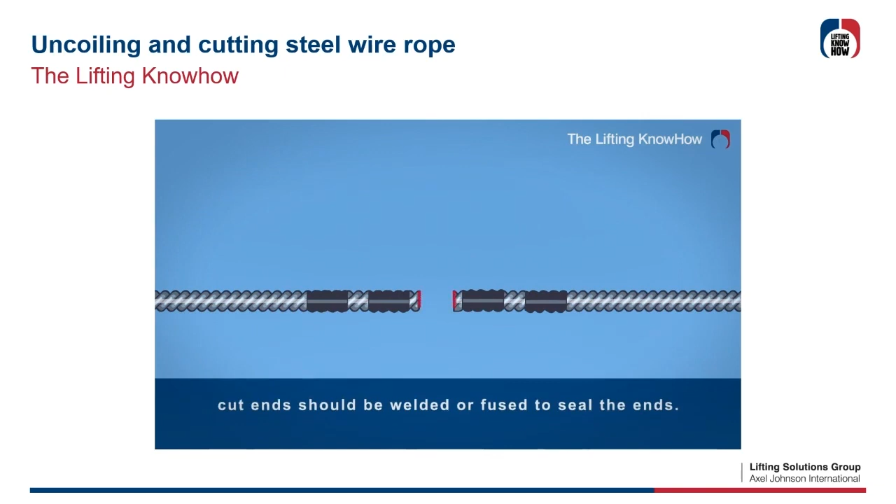And then for cutting rope, if you cut a rope like this, and certainly the high performance ropes, it's going to split and it's going to be terrible. Your rope will be damaged. You're not going to correct it. So what you need to do is you do seizing on a 6 and 8 strand rope. You do 2 times seizing on a special rope or a non-rotating rope, you do it 4 times. And then you cut it immediately through in one seizing and in one cutting through, and if possible, if it is a non-rotating rope or a high-performance rope, you can fuse it.

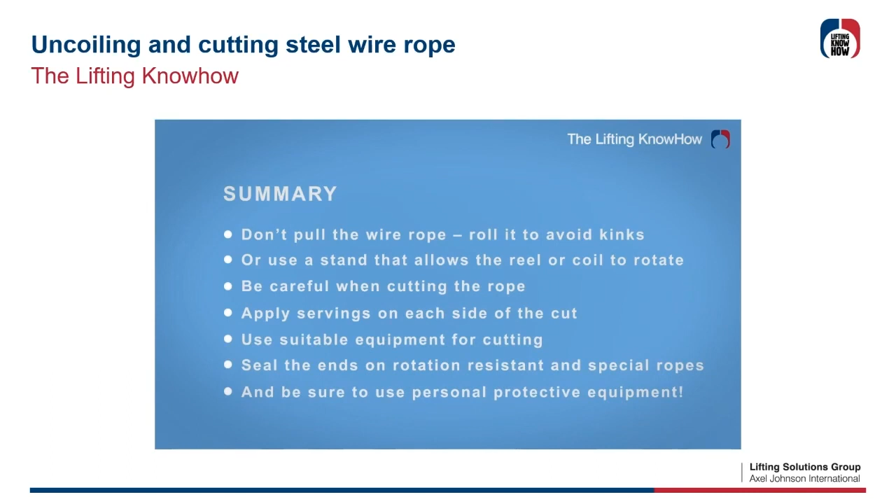You can fuse the ends so that the rope won't open up again. So very important: don't pull your rope when you coil or uncoil it, and be careful when you cut the rope. You have to do the right seizing 2 times or 4 times, depending on the quality of your rope. If you have questions about this, we can show you more. Just call us and we will inform you how to do it.

Okay, that's it, I think, for my part. Let's wrap up. I've talked about all different kinds of standard procedures for end terminations. I know there are some others for specific applications, but let's see what we can have already for some questions that popped up.